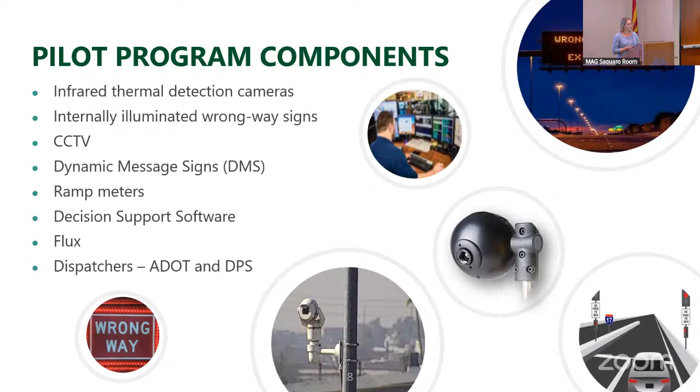The I-17 pilot was laid out in this manner. If a wrong way vehicle enters the exit ramp, a camera does detect that. It takes a short 10-second video of that action that gets sent back to our traffic operations center. Dispatchers there will review the video and activate the decision support system if needed, if it is truly a wrong way event. When that thermal camera at the ramp detects a wrong way vehicle, the illuminated wrong way sign will come on in an attempt to get the attention of that wrong way driver to get them to turn around.

Otherwise, they can proceed on to the main line, which is not what we want them to do. However, the TOC dispatchers can activate the decision support system. By doing that, they will activate wrong way messaging on our DMS boards, as well as turn the cameras to where that wrong way vehicle entered. This allows us to really help notify DPS of where there is an event and help them have a faster response to interact with that vehicle.

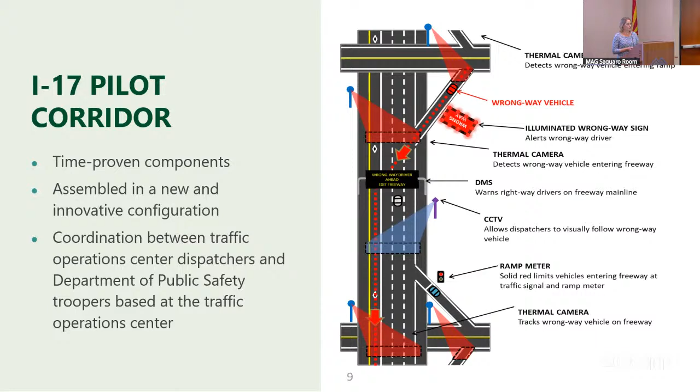The results of this pilot project, because this was just along the 15 miles of I-17, we found that having detection of knowing where those wrong way events were happening allows us to notify DPS that much faster. Out of our analysis, we found that a high number of those drivers did actually turn around and self-correct. Only about 10% made it onto the main line.

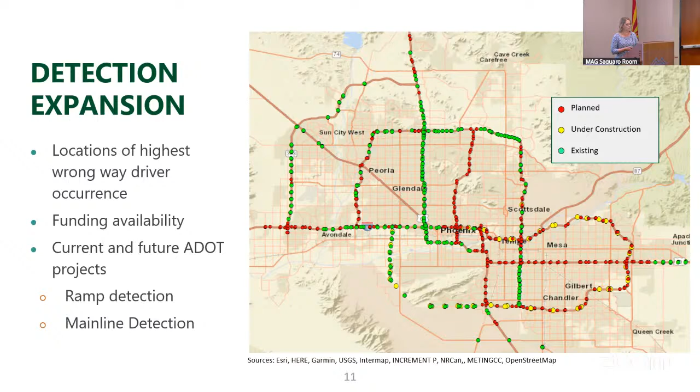Current projects that we have underway are on the Loop 101. The first section, funded through MAG, was to install wrong-way detection between Loop 101/I-10 and Cardinals Way. That one has been completed.

The second project covers the entire Loop 101 corridor, where we're mounting thermal cameras on our DMS boards. These are very stable devices we can use for mainline detection, and the Loop 101 project has been completed. We're doing a similar project in process along the Loop 202 corridor.

Other projects, as you're aware, like I-10 Broadway Curve, will be installing wrong-way detection as those become deployed.

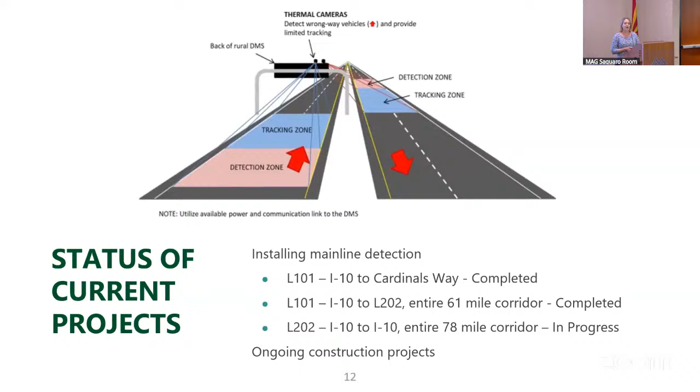If this is an actual wrong-way event, they press the decision box that says yes, activate. With that, DMS boards upstream are populated with a warning to right-way drivers of a potential wrong-way vehicle on that corridor, and the CCTV cameras turn toward where the event occurred. So we can essentially automate a bit of this system.

This decision support system was only deployed with the I-17 pilot, but this past year a big effort by ADOT is to deploy this system for all of the cameras we have throughout the valley and the state.

Our current progress: the first pilot project deployed this for the 90 cameras we had on I-17. Currently, we are deploying an additional 230 sites.

With this added feature, we'll be able to save about 20 seconds in notification time, and with emergency response, every second counts in saving a life. So we're very excited to have this underway.

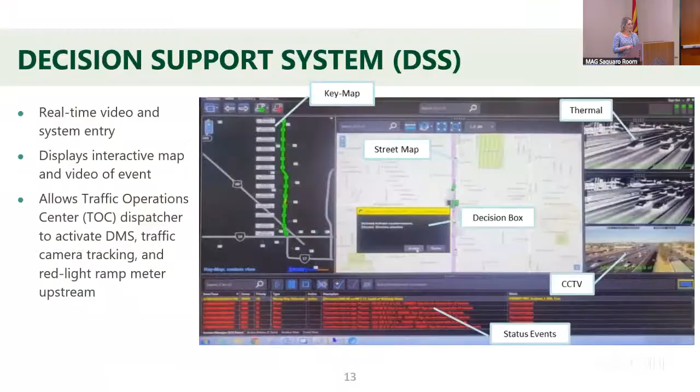That is because as we roll out more wrong-way devices throughout the valley, we have more detection devices, so we know more of what is happening. We're able to monitor the system more and know that there are more wrong ways occurring.

To help us understand where this is happening, we've also deployed a performance metric for corridor-level data. This essentially creates a heat map so we know where wrong ways are happening.

We also line this up with DPS as they get reports of incidents from 911 calls.

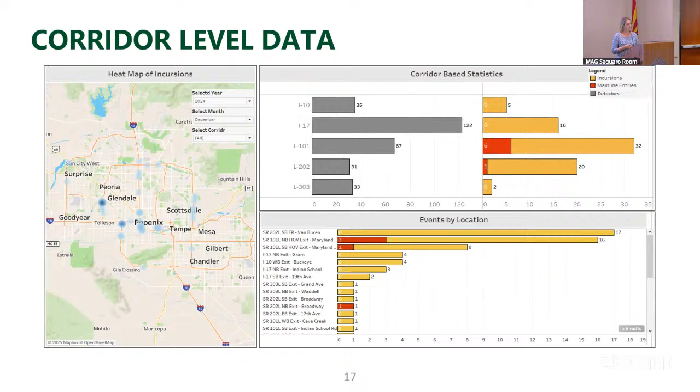As we continue to roll out Wrong-Way, operations and maintenance continues to be an issue for ADOT. More locations just means more equipment to maintain over time. We continue to have an increase of data that we're having to go through and scrub and verify, but we continue to update these dashboards and monitor what's happening. On ADOT's side, this has been an opportunity for us to standardize our work by deploying an operations plan and specific training for our staff at the Traffic Operations Center. All of this is helping us coordinate with DPS and provide better operations.

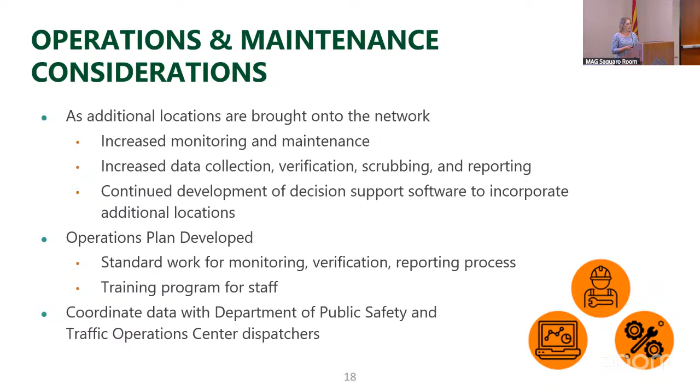Our conclusions: ADOT is going to continue to implement countermeasures as we can to mitigate Wrong-Way. The I-17 pilot definitely provided a lot of good lessons learned that we can deploy. Throughout, we're going to continue to deploy our thermal detection cameras. We found that they have been very successful in letting us know what is happening out there, and we will continue to try to enhance the system. We're excited about having the decision support system updated this year. With that, we see detection and notification really being our basis for continuing the Wrong-Way detection program.

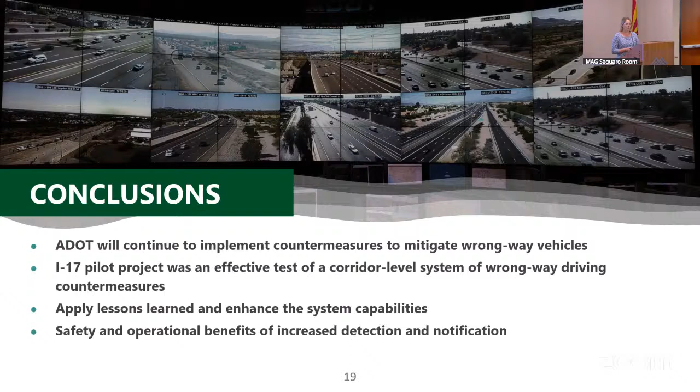With that, I believe I'm handing it back over to Sarvani. If you're interested, our Wrong-Way detection pilot project was documented and it's out on ADOT's website. And if you need to contact me or Mr. Mark Salute at our TOC, please do so. Thank you.

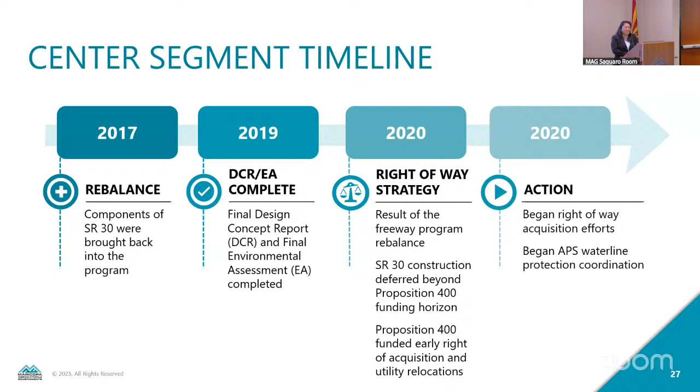ADOT began those activities shortly thereafter, and I'd like to give you an update on where those activities are today. So the center segment requires the acquisition of 433 parcels. That is a massive undertaking.

With the guidance and approval of this body, ADOT created an innovative approach. They call it the right-of-way management plan, which strategized and prioritized acquisitions and also took into consideration parcels that had long acquisition times, such as dairy farms. This approach has been extremely successful, and ADOT intends to use this on future projects where right-of-way acquisition is not straightforward.

So to get into the numbers a little bit, as of March, ADOT has acquired 52% of those 433 parcels. They are also currently in the process of acquiring 18% more. Combined, that is a total of 70% of the 433 parcels that have either been acquired or are in the process of being acquired. That is a great accomplishment.

We have 30% of the parcels remaining that still have to start the acquisition process, but the majority of those are located in the western half of the center segment.

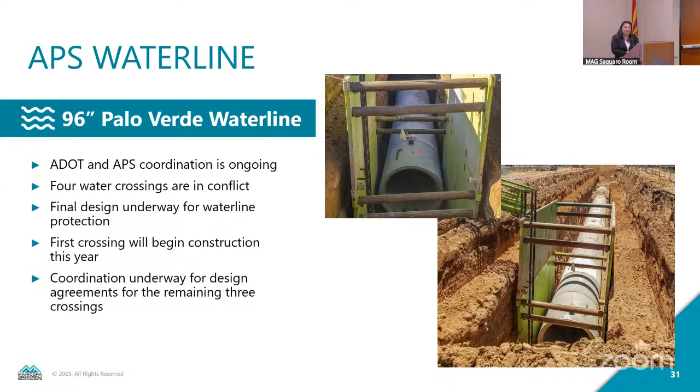ADOT is currently coordinating with APS on their 96-inch Palo Verde water line. SR 30 crosses that water line at 4 locations. Currently, APS is at 90% design on the easternmost crossing, and we anticipate construction to begin later this year. ADOT and APS will continue to coordinate on the remaining 3 crossings, and we anticipate that construction to complete all 4 crossings will take approximately 5 years.

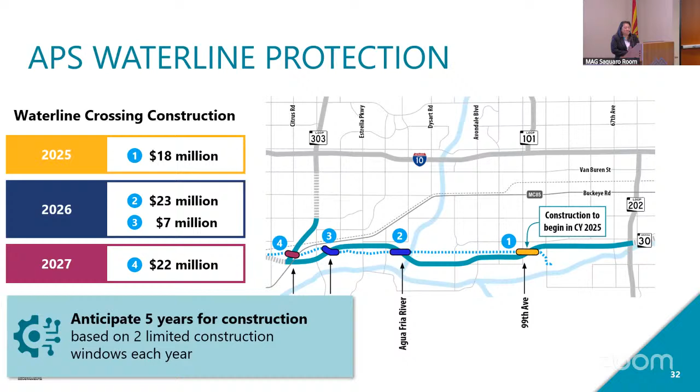The main reason for that is there are 2 very limited construction windows in which this type of construction can be performed during a calendar year, and each window is only about 1 month long in duration. We can't interrupt service, so that's the main reason.

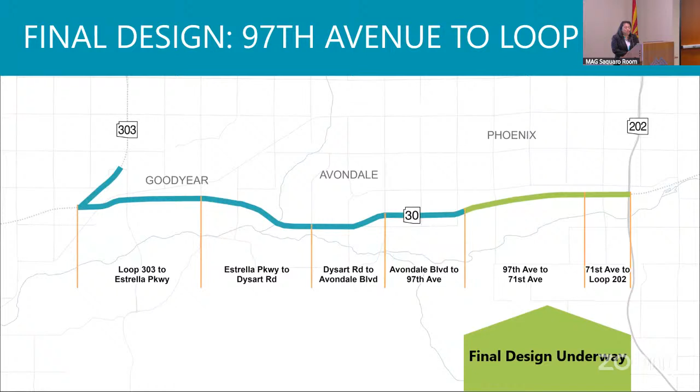And lastly, ADOT is currently in final design for the 97th Avenue to Loop 202 South Mountain projects. ADOT initiated final design in October of last year and is anticipating 2 years to complete design, with a bid advertisement for construction scheduled in the late winter of 2026 or early spring of 2027. So construction is anticipated to begin in the summer of 2027 and take approximately 3 years to complete. And with that, I will now hand it over to Troy, who will talk about the keys to implementation.

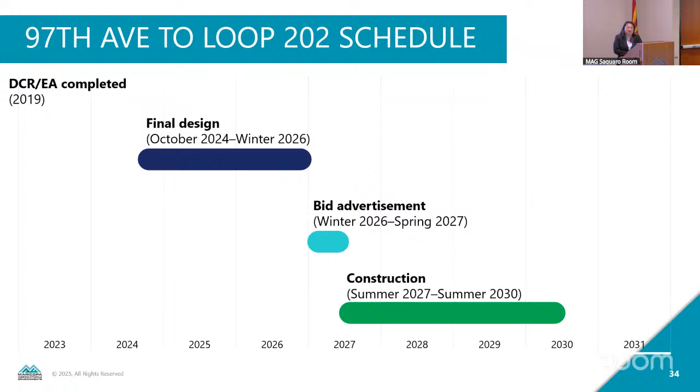Thank you, Velvet, Madam Chair, members of the Transportation Policy Committee. There are several areas that need to be addressed prior to construction. Velvet's already talked about a few of those.

As mentioned earlier, ADOT's been working to acquire the needed right-of-way for the entire SR 30 corridor. All of the land that the freeway needs to be built on must be acquired and cleared before construction activity can begin. As Velvet mentioned, we're nearly 70% complete with the acquisition of the right-of-way, but to continue the acquisition process will require additional funding over the next 2 years.

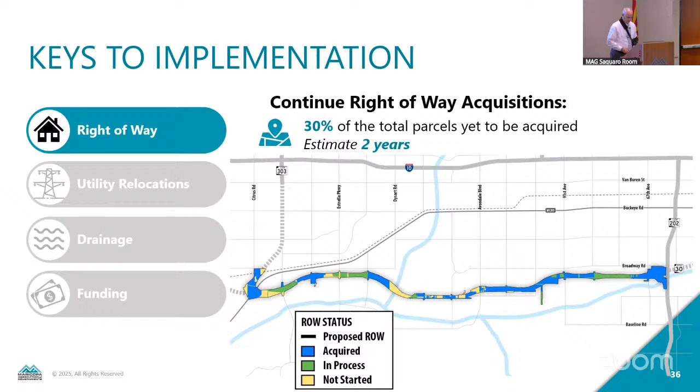There are also a number of significant utilities in the SR 30 corridor that need to be addressed. Most notably, there are some very large transmission power lines in the corridor. These cross at 4 different locations on the future SR 30 center segment freeway. Some of these range between 230 kilovolts to 500 kilovolts in size. So they're the massive towers that you see. By way of comparison, a lot of the power lines that you see as you're driving down the road, those are about 12 kilovolt to 69 kilovolts. So these are very large relocations.

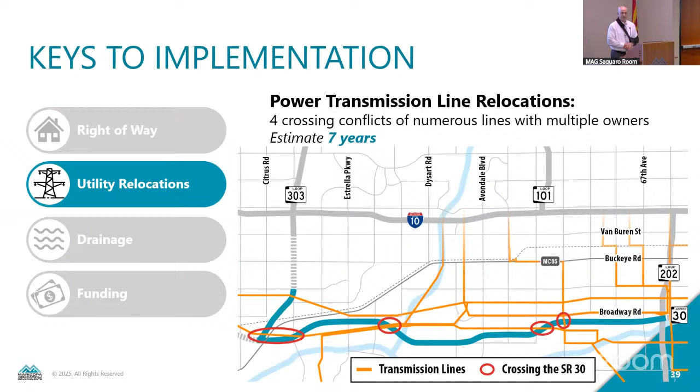They take a long time to move, in some cases up to 7 years to plan, design, and relocate those facilities. So again, there's 4 locations where these power lines cross the corridor. Beginning on the west end, near the future interchange with the 303 freeway, we've got 1 location, another near the Agua Fria River, and then the other 2 near 97th and 99th Avenues.

Additionally, Velvet mentioned the 8-foot water line that goes from the 91st Avenue water treatment plant out to the Palo Verde nuclear generating power station. Very important facility that must be protected. This water line cannot be relocated. It must be protected in place.

And then as Velvet mentioned, right now we are in final design for the 99th Avenue crossing. That's at about 90% now. We expect that to go to construction later this year, with the other 3 crossings following soon after.

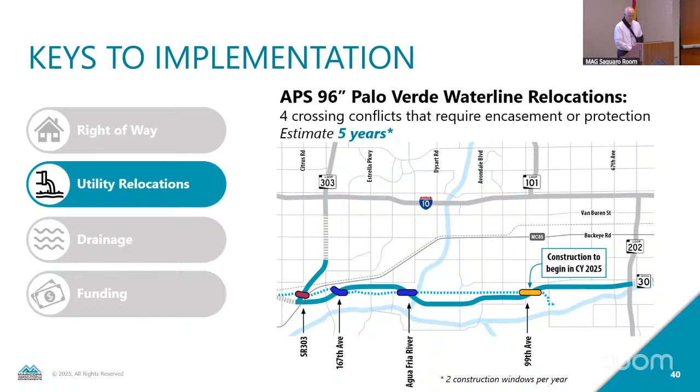And then as Velvet mentioned earlier, the design concept report and environmental document were completed nearly 6 years ago, so it's already been that long. Some of the assumptions that were made during the design concept report and environmental process anticipated that some regional drainage facilities would be in place prior to construction of the SR 30 corridor. Some of those have not yet materialized, so some of the assumptions in the design concept report will need to be updated, particularly as it relates to drainage.

And so you can see on the screen here, we've got miles of drainage channels, multiple detention basins, and several outfalls to the Agua Fria, to the Salt River. All of those need to be reevaluated before final design and construction can begin.

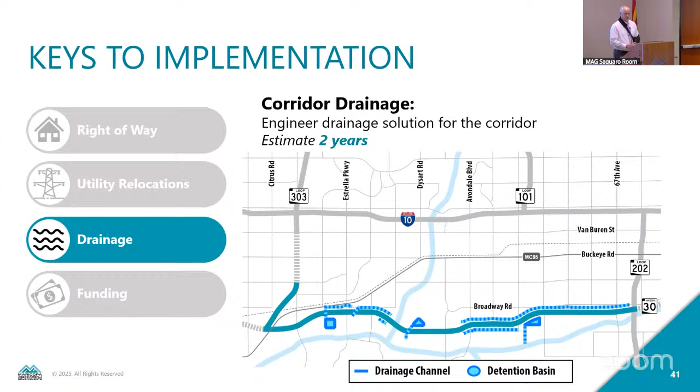So funding is obviously a key to all of this. Right now, we've touched on a few of these items. There's already been a lot of dedicated funding that you all have provided for the acquisition of right-of-way. Again, additional funding will be needed to continue that process and finish with the goal to be done within the next 2 years. We need to continue working on protection of the Palo Verde water line, as well as relocation of those large transmission corridors. And then we need to look at possibly advancing the design so that we can address some of those outdated assumptions that we discussed previously.

So what have we done to try to strategize our plan to move this forward? Back in January, MAG staff, along with several key ADOT technical teams, convened to hold a workshop to look at how to best implement the SR30 freeway so that we can efficiently deliver it in the early phases of the Proposition 479 program.

So we looked at a number of alternatives. Some of these we've already covered, but there were a number of others considered as well, including advancing some of the bridge construction. And then we also wanted to look at what's the best method to construct the corridor itself.

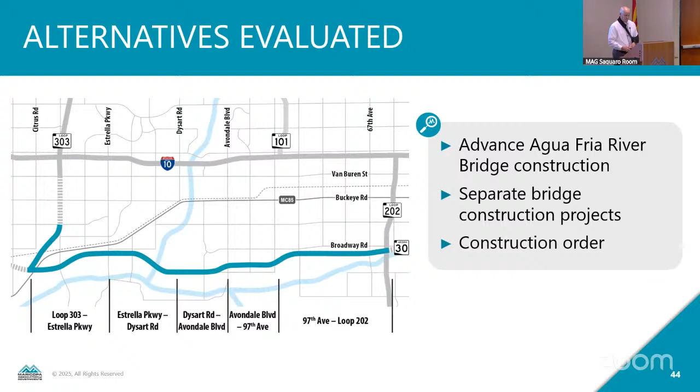In terms of advancing some of the construction of the bridges, as you can see on the screen here, there's a large number of bridges needed along this corridor at the various cross streets, canals and drainage facilities, as well as rivers, including a very long bridge at the Agua Fria River that's over a mile long. So some of these bridges are going to take multiple years to construct.

So what we wanted to do was look at whether we want to consider having separate bridge construction projects that we could procure, get out there, have them constructed, and then as the freeway is constructed, it would connect to those bridges.

What we found as we looked into it further is it's likely to lead to higher implementation costs. We would have to procure multiple designers, multiple contractors. We would lose some economy of scale that you get with larger construction projects when you break it into smaller pieces. Additionally, there's the potential that some of these bridges would be in place for several years before any traffic ever gets to it, so you'd have bridges sitting unused for a long time.

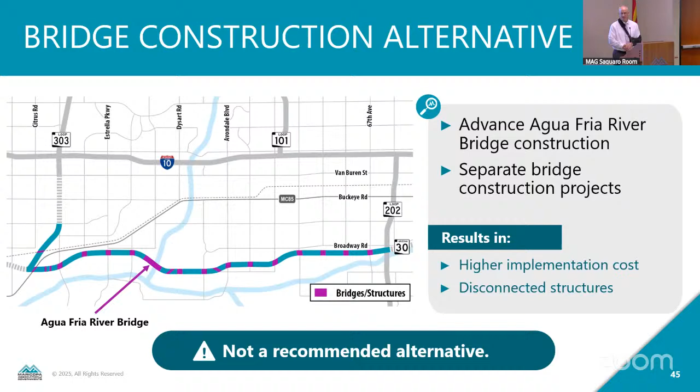So then we also looked at the order of construction of the corridor itself. Is it better to build from the ends on the east and west and work toward the middle, or work from the east end continuously toward the west?

Originally we were looking at 5 different segments for construction. As Velvet mentioned earlier, the 97th Avenue to Loop 202 construction is already in final design, not construction, and hopefully it'll go to construction in the next couple of years. But once that's constructed, we would have a continuous point from 97th Avenue over to the 202, and traffic could access the remainder of the freeway system.

What ends up happening, though, is when we start separating out the next segments of construction, if we were to go to the west end, you end up with discontinuous traffic flows. So you'll end up with a section that has very little traffic, and the section from 97th to 202 would carry more traffic. It also complicates maintenance of traffic when you're working on the ends, because now you're affecting traffic on both sides instead of just one, creating more delays and complications.

So again, if we worked on that western segment, it's unlikely that it would carry much traffic until that full connection is made. One of the major benefits of the SR30 corridor is that it will relieve a lot of traffic from I-10, and until you have that more continuous connection, it's not going to relieve as much traffic. Eventually the connection would be made, but it would take several years.

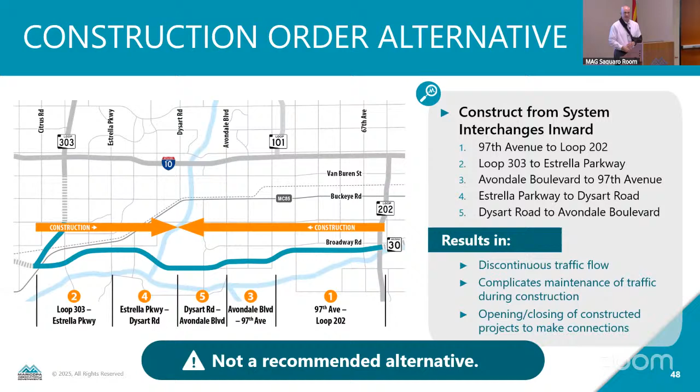So now what we wanted to do is look at what would happen if we worked from east to west. The first thing to note is we've taken 2 of the 5 segments and condensed them, so now we've got 4 construction segments. The first segment would be that 97th to 202 segment that's in final design, and then we'd have 3 more follow-on projects instead of 4. That would increase the efficiency of design and construction, as well as hopefully reduce the amount of time it would take to implement the corridor.

But some of the additional benefits are it provides better regional traffic operations and continuous traffic flow as projects come online. I'll walk you through a series of maps here.

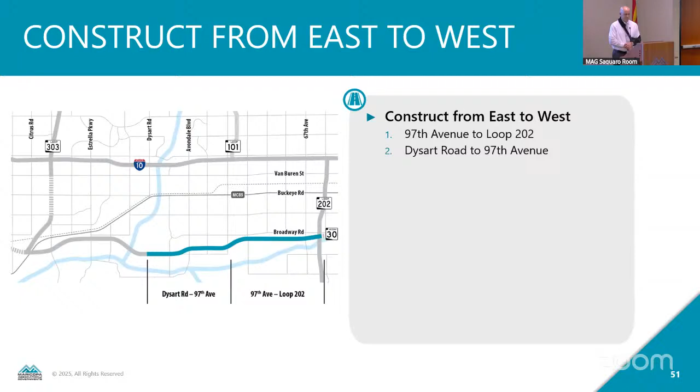So we talked about implementing that first segment between 97th and 202. All of the traffic between 97th and 202 has a continuous path to get toward the central metropolitan core. Then as we go to the next segment, you go all the way to Dysart and have a continuous path all the way to the 202, accessing the regional freeways. Then continuing on from Estrella, and finally you have the Loop 303 system interchange.

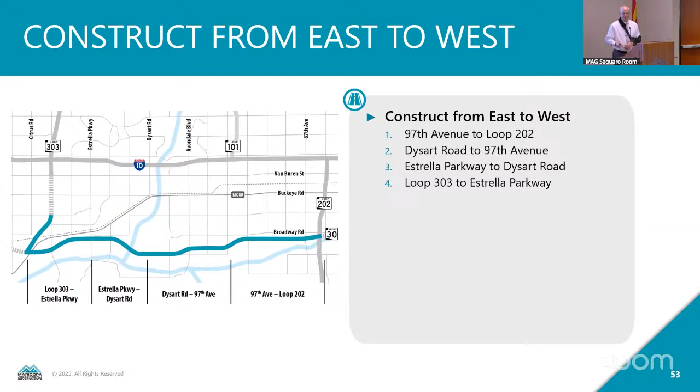So the key point there is that you're not separating the traffic flow. You're keeping it all continuous, and as elements of the freeway come online, traffic will continue to flow, with no need to get on and off of a freeway facility.

So what are our recommendations? We've gone through a number of items here. Our first recommendation is we think we should consider continuing with the concept of constructing from the east to the west for the corridor, combining the two segments we discussed so that we have 4 construction segments instead of 5.

This should help with some construction efficiencies and economies of scale. We need to prioritize continuation of the right-of-way acquisition process with the goal of being finished within the next 2 years so construction can begin. And then we need to address those major utilities, those large transmission power lines which are going to take up to 7 years to design, plan, and relocate. We've also got to protect that APS Palo Verde water line. Additionally, there's a number of other utilities in the corridor.

Another recommendation we're making is that we would initiate the final design process for the remainder of the corridor. Right now we've just got 1 segment, so we'd initiate design for the other 3 segments. Part of that would look at updating a lot of the assumptions made during the design concept report, including all of the drainage assumptions. And then concurrently with the final design, some of the other impacted utilities — smaller power line relocations, water, sewer, irrigation — can be going concurrently with the final design process.

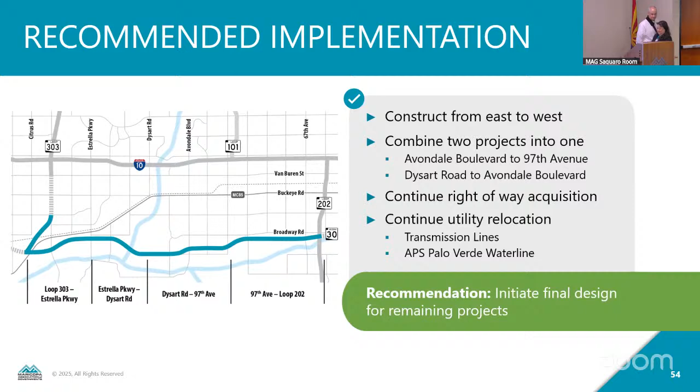Based on the recommended alternative implementation alternatives, as well as the timeline it will take to construct the center segment, we are recommending the following schedule. The construction will span both phase 1 and phase 2 of the RSTIP.

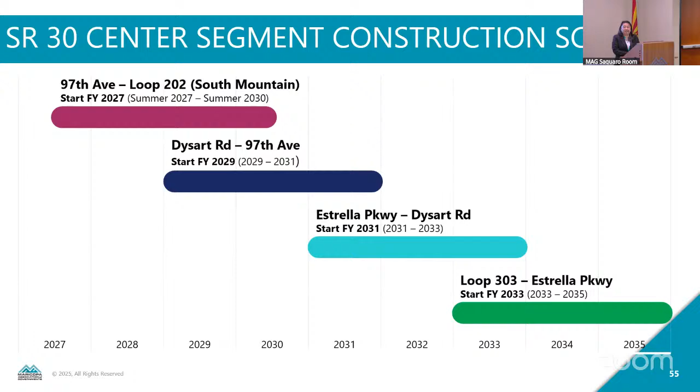97th Avenue to Loop 202 South Mountain would begin construction in the summer of 2027. Dysart to 97th Avenue would begin in 2029. Estrella Parkway to Dysart will begin in 2031. And then the final project of Loop 303 to Estrella Parkway would begin in 2033. With that, that concludes our presentation, and we'd be happy to take any questions.

Excellent, thank you Velvet and Troy. Appreciate the presentation. I'm never envious of those that sit in the room that have to determine the programming for a project this complex, with the right of way, utilities, drainage, everything that goes into it. So we appreciate this presentation today.

Are there questions or comments from the committee members? Yes, Vice Mayor Garland. Thank you, Chair. When I was reading through the documents I didn't see anything about archaeological sites — it could be I'm new so I don't understand all of this. What do you do when you come across those? Who do you reach out to, what are you looking for, and how does that figure into the timing?

Madam Chair and members of the Transportation Policy Committee, as part of the environmental process, that is where ADOT has gone about and done the research to find if there are any. At that time, if sites are identified, a mitigation plan is set into place that could take part during final design or as part of construction. So that is definitely taken into consideration.

Thank you. Yes, Mayor Osborne. Chair, thank you. I think all of us on the west side are asking, how can we make it go faster? And I'm serious about that.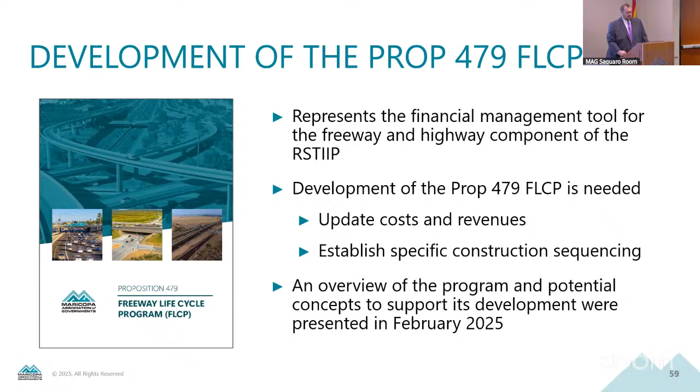Thank you, Madam Chair, members of the TPC. This item really builds off the previous one, as well as the conversation we initiated back in February. As a brief reminder, we established these life cycle management programs as financial management tools to implement the projects within the RSTIIP. Today we're here to talk about the freeway program itself. We talked about a lot of those concepts back in February, and this really represents the first iteration, or the first version, of the program that we wanted to walk through today.

As a reminder, when we're talking about building out the Prop 479 freeway program, there are three primary objectives we have to consider. First, we have state statutes that require we build a fiscally constrained program. What does that mean? It means that over the 20-year life of the sales tax, our projected expenditures have to be in balance with our anticipated revenues.

We also need to go through the process of establishing the near-term project sequencing. Unfortunately, one of the consequences of the veto from a few years back is that everything is much more condensed than we otherwise wanted. So we sit here today in fiscal year 2025, and the sales tax starts collecting in fiscal year 2026. In transportation terms, as you all know, that is an overnight element. So we need to get the program in place so we can start to get some of those projects queued up. And of course, conditions have changed since we put the RSTIIP together back in 2021, so we need to address some of those changes.

So I wanted to walk you through the first draft program here today. As a quick reminder, we talked about this back in February, but we are using revenue projections generated over the fall and winter. This is standard practice, part of the normal Prop 400 program, and we're following that same course of action. In order to get the program balanced, we are developing this in the midst of historic construction cost increases. We had to look for every opportunity for savings to build a financially balanced program that we could.

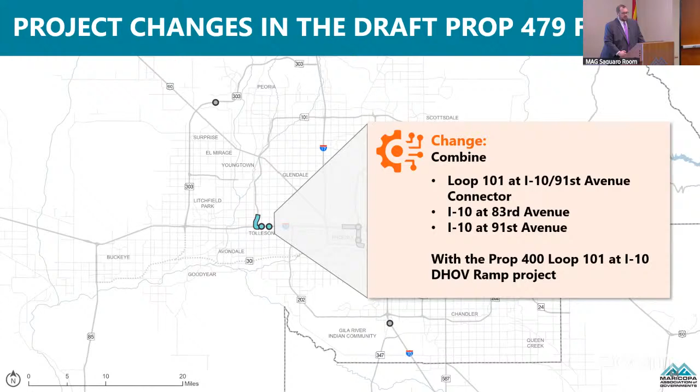The first one has to do with Loop 101 around I-10. We have a Prop 400 project set to hit the street this summer to construct a direct HOV ramp between Loop 101 and I-10. As we talked about in February, we recommend combining the Loop 101 at 91st Avenue project with that one, as well as improvements at I-10 and 83rd and I-10 and 91st Avenue. This will result in significant cost savings and less disruption to the traveling public.

The next one is in the South Valley, I-10 Wild Horse Pass. A few years back, the legislature appropriated money to improve I-10 between Phoenix and Casa Grande, and there's state appropriation money to do this interchange upgrade. Our recommendation is that the upgrade occur as part of the Prop 400 funded project, and the larger ADOT effort, slated to occur sometime this summer.

Up in the Northwest Valley, currently in the RSTIIP we have a new interchange at Loop 303 in Litchfield. We've been working with our partners at ADOT and the City of Surprise, among other stakeholders, to identify if there's a better interchange location. We've recently completed a comprehensive technical analysis. ADOT just went out to the public regarding improving traffic conditions at Loop 303 and US 60, which is a major challenge today. The Loop 303 and 155th Avenue interchange performs better, so our recommendation is to swap the Loop 303 at Litchfield project with Loop 303 and 155th Avenue.

The final change is an outfall of the study accepted a few months ago, the I-10 corridor freeway study. We have a number of projects to improve the inner loop of I-10 there, and the changes reflect how we intend to implement those projects. The first would deal with the mini stack and State Route 51. The second would improve I-10 from the tunnel down to the split, including improving access to the airport, aligning with the study we've discussed at this committee.

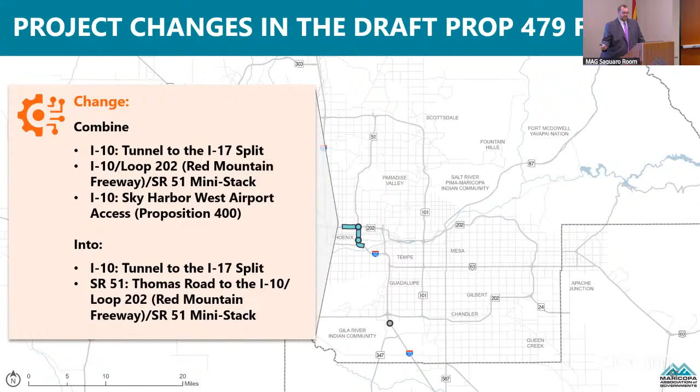This would be turned over to ADOT to initiate formal scoping and environmental work. As they go through that process, if there's an alternative implementation schedule, we'll bring it back through the TPC at that time.

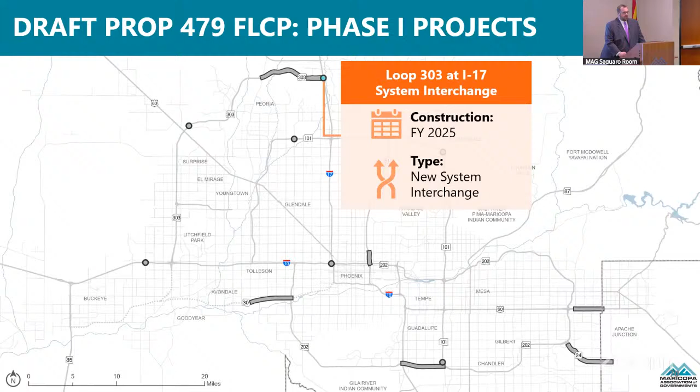Next, I want to touch on some of the phase 1 projects. The way the draft program has things slated, the first Prop 479 project out the gate would be construction of the system interchange at Loop 303 and I-17. This project is in final design now, slated to be completed over the next month or so, and with approval of the Prop 479 freeway program, ADOT could initiate this for construction this summer.

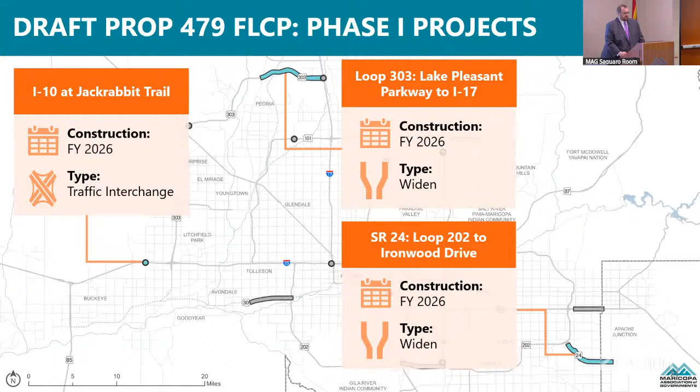We have several other projects proposed in fiscal year 2026, including general purpose lanes on Loop 303 between Lake Pleasant Parkway and I-17. Originally we assumed that would be part of the Loop 303 I-17 system interchange project, but based on feedback from ADOT, they've asked that it be decoupled, with the Loop 303 general purpose lanes trailing the system interchange project. We also have funding for construction of I-10 and Jackrabbit Trail in the Southwest Valley, and completion of State Route 24 between Loop 202 and Ironwood Drive in the Southeast Valley in fiscal year 2026.

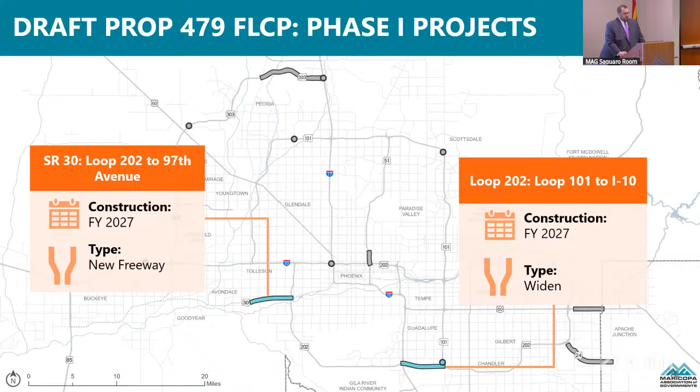And then in fiscal year 2027, we just covered State Route 30, that first section between 97th Avenue and Loop 202, and then completing the Loop 202 Santan widening between I-10 and Loop 101 down in the Chandler area.

Then lastly, I just wanted to touch on some of the notable project development activities that are early in the draft program. We have a number of scoping and environmental projects that would kick off. Just to underscore, these are very major undertakings that will really set the footprint for what those projects are and establish how those projects will get implemented.

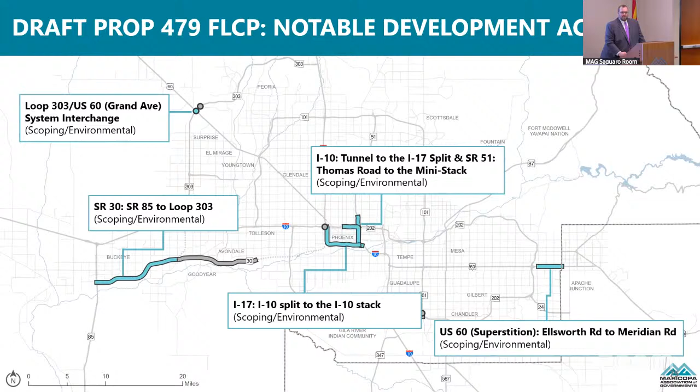Of course, we have the I-10 tunnel, the split that I had just talked about. We have the first section of the I-17 rehabilitation and reconstruction between I-10 Maricopa and I-10 Papago. We have SR30 Western segment, US 60 widening out in the East Mesa Apache Junction area, and then scoping environmental for the ultimate system interchange at Loop 303 and US 60.

And then a number of projects going to final design. Included in that are the new proposed interchange at Loop 303 and 155th Avenue, the State Route 30 final design that Velvet and Troy just presented on, Loop 202 down in the Chandler area, and the I-17 West Connection project.

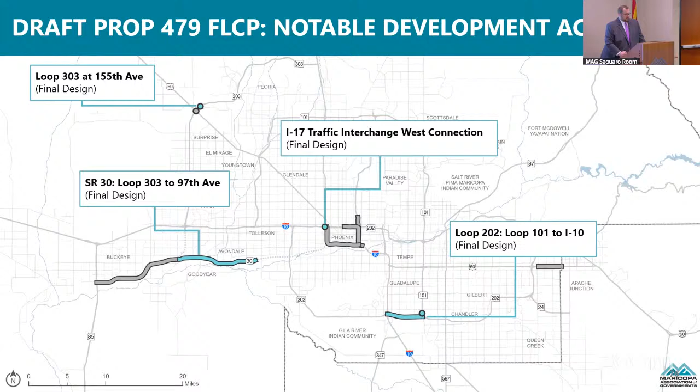So just looking ahead, where do we land from a financial perspective? Based on our preliminary cash flow, we are ending fiscal year 2046 with a very small fund balance, $370 million total. That sounds like a lot, but in the freeway world, that is not a very large fund balance. It's also important to note that some of the project expenditures will actually trail beyond 2046, but they will be supported by those ongoing revenues.

So federal formula funds, HURF funds, not necessarily another continuation of the dedicated half-cent sales tax, just for purposes of planning. And I want to underscore this last point: there's very little contingency left. We have squeezed every ounce of contingency out of the program to manage through the historic construction cost increases that we could. We are very tight, but there is little room left.

So as things evolve over this next year, we'll have more insight, whether that's on the federal revenue side or on the economy side. The good news is that we update this program annually, so what transpires over this next year we can capture in the next year's update. But I do want to underscore the point, we are very tight as part of the program.

Depending on the feedback we get from you all today, we intend on making any necessary adjustments to the program. And we could be looking at moving forward for recommended approval as quickly as May, which would really set in motion some of those projects that I had talked about. So with that, Madam Chair, I'd be more than happy to answer any questions.

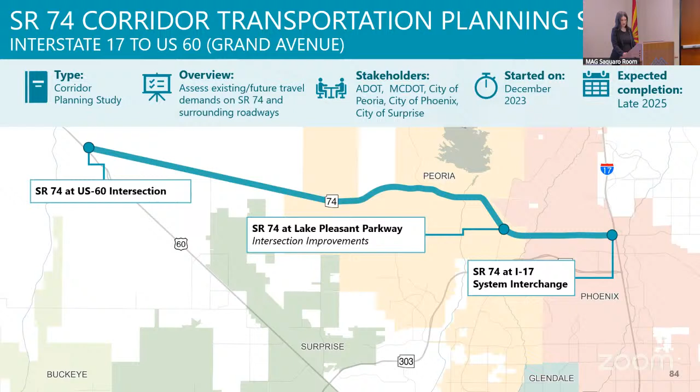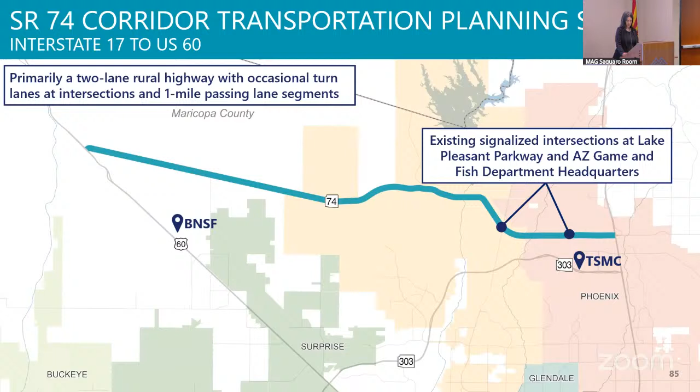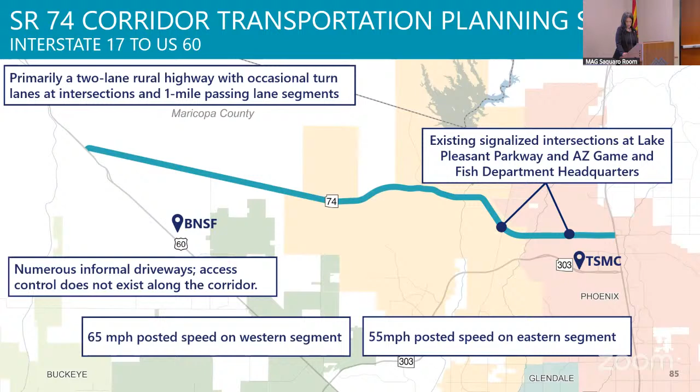State Route 74 is primarily a 2-lane rural highway with occasional turn lanes at intersections, as well as 1-mile passing lane segments. We have existing signalized intersections at Lake Pleasant Parkway and the Arizona Game and Fish Department headquarters. There are numerous informal driveways, as access control does not currently exist along the corridor. There's a 65-mile-per-hour posted speed limit on the western segment and 55 miles per hour on the eastern segment, with the breakpoint between the two at approximately 87th Avenue.

The study began with looking at crash data along the corridor. In the 5-year period reviewed, there were 158 crashes. The majority of these were attributed to animal strikes and to certain access points. Let's take a closer look at that data.

First, the crash concentration. A high number of crashes are concentrated at the intersections shown here: the Bureau of Land Management off-highway vehicle access intersection, Castle Hot Springs intersection, Old Lake Pleasant Parkway, 87th Avenue, and the Lake Pleasant Parkway intersection.

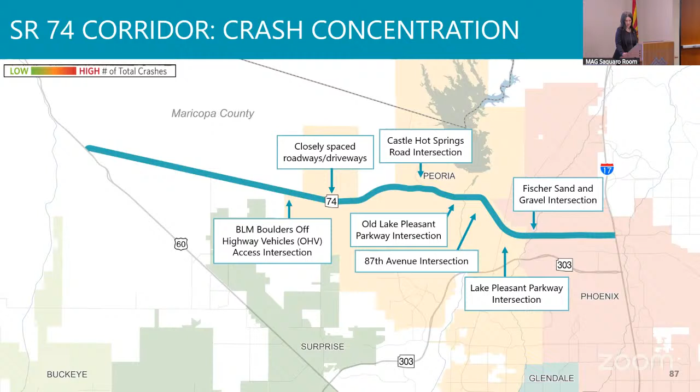These are the crashes located at intersections or access points along the corridor. Each of those diamonds represents an access point along the corridor. Today there are 11 intersections in total, but again, there are many driveways that are not formally designated access points.

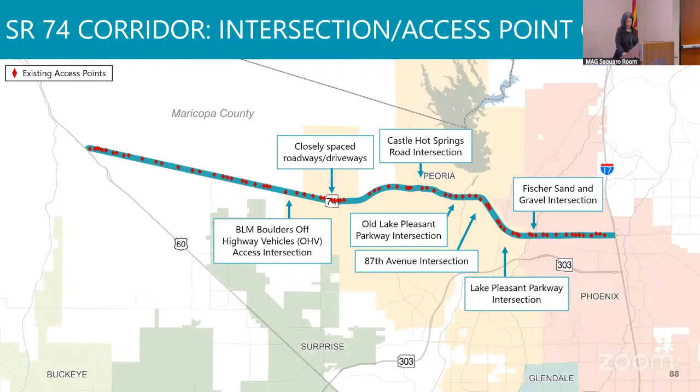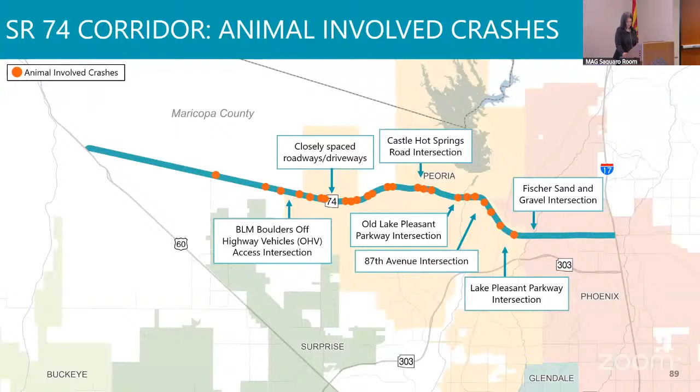And then lastly, this shows the locations of animal-involved crashes. State Route 74 is a rural roadway, meaning there is no barrier or fencing along the shoulder, just open desert. So when wild animals are looking to cross, they're often involved in crashes with vehicles.

Next, I'll update the study progress, which is information that's been shared with our study stakeholder staff. We're going to go through existing conditions and our modeling results.

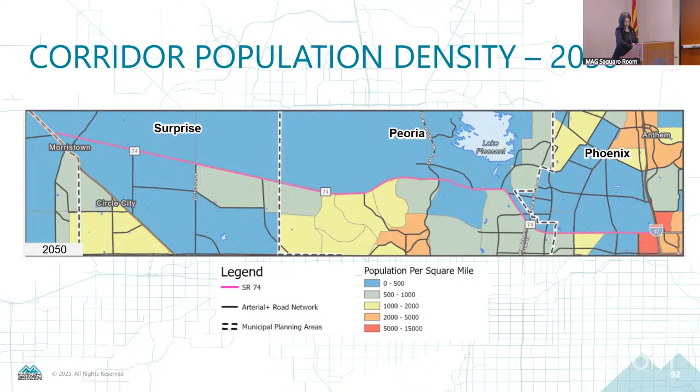employees range. In 2050, there's a dramatic increase here - it's expected that employment along the corridor will grow much more, in the 100 to 2,000 range, as well as 2,000 to 5,000, and even 10,000 to 20,000 close to TSMC. That is a 10-fold increase.

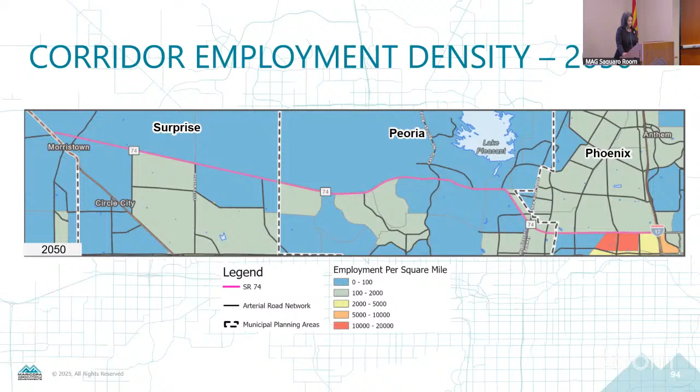MAG recently had a study with area stakeholders and presented the following information. This is a simplified version of a cut line analysis. The gradient line shows the number of vehicles per day traveling along the corridor in 2050, traveling east to west,

west to east, the number of vehicles using the corridor is expected to increase to about 15,500 per day in both directions on the west end, up to 62,000 vehicles per day near I-17.

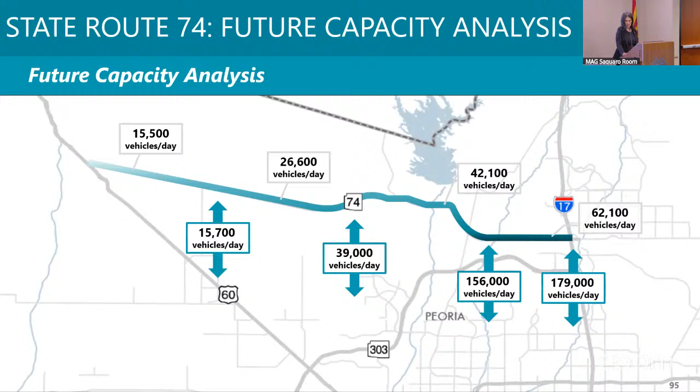Similarly, we looked at travel to and from the corridor. We had 15,700 vehicles per day on the west end, increasing to 156,000 vehicles per day on the east end. That 179,000 figure, for reference, is I-17 traffic.

So some key takeaways from our study. Traffic modeling reveals that most travel demand on the corridor is north-south and not east-west, which we had initially anticipated.

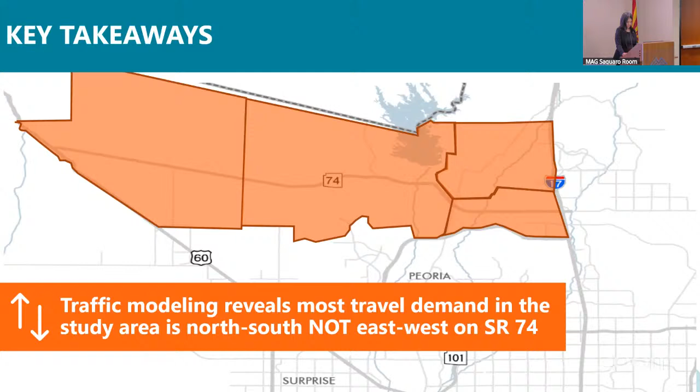The traffic modeling shows that between Agua Fria and I-17, the State Route 74 corridor will need to be a 4-lane facility by 2050. However, between US 60 and Agua Fria, the 2-lane section will operate acceptably until 2050. Beyond 2050, the entire corridor will need to be a 4-lane facility.

Great, thank you. Questions for Quinn? You left us all speechless.